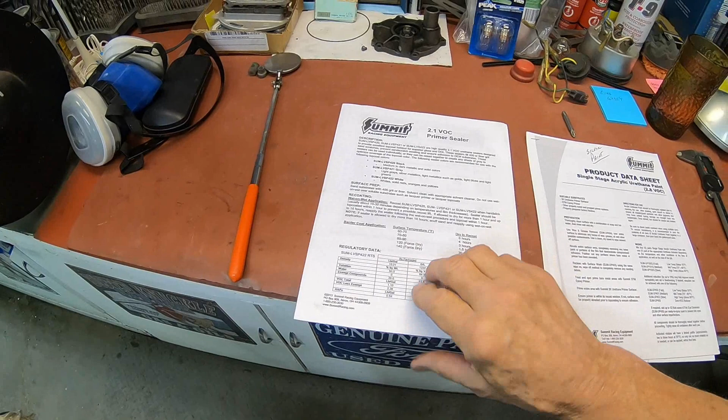Okay, these are what I'm going to use on the 125 MX gas tank. I'm going to use the primer sealer from Summit, and it tells you how to mix it, how long to wait between coats, how long to wait before you tape it. Anything that you need to know is on that sheet. So that's good to have. I mean, it's imperative that you have it.

And then I'm going to use an Omni, which is a PPG product, for my base coat. And it's going to be an MBC, and everything that I'm using for that is urethane. And this is the base coat. And again, it's going to show all the wait times, your gun setup, your dry times, recoat times, and what compatible products there are.

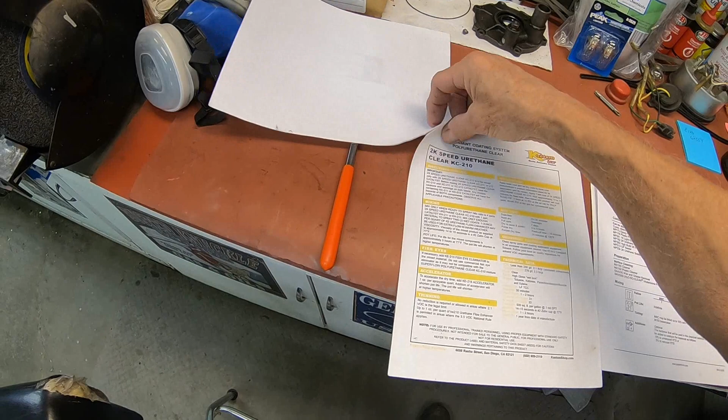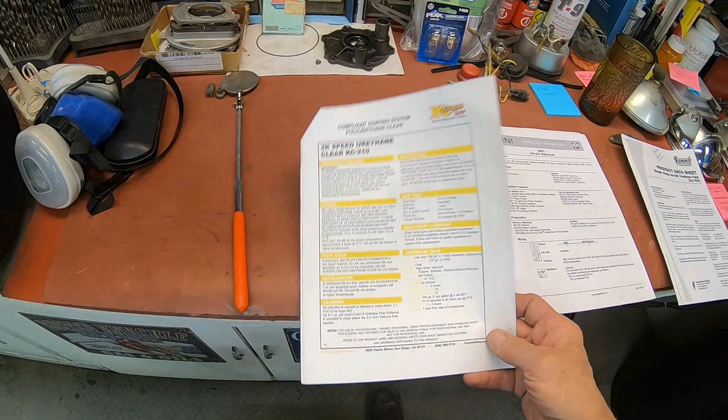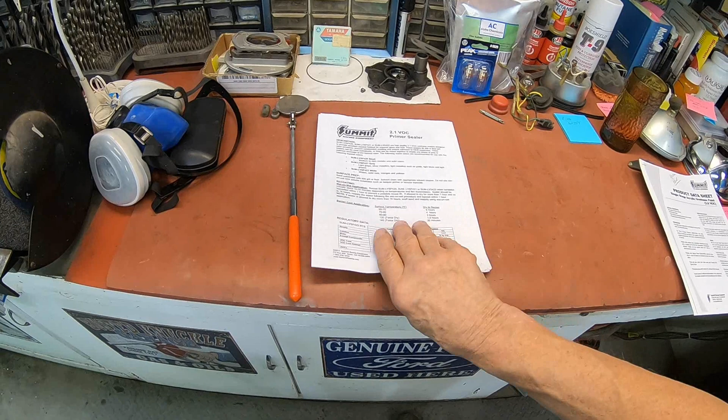And then when it's all said and done, I was painting cars for a while, and this is just leftover stuff. This is the Kustom Shop. I used to get this from, I'm trying to think of the name of it. It's TCP Global out of San Diego. And I bought a bunch of clear, and I've still got a bunch of it, and I use it, and I have not had any problems with it. So that is the lineup for that. And of course, the base coat.

This also includes the silver that goes under the red base coat. For the candy colors, you've got to have a silver in order to make that pop right, or silver for these bikes. That's what Yamaha used under theirs. So I'll have the silver, which will be one, and the other one is the red, and they're both MBC urethanes. So everything I'm going to use for that is right there.

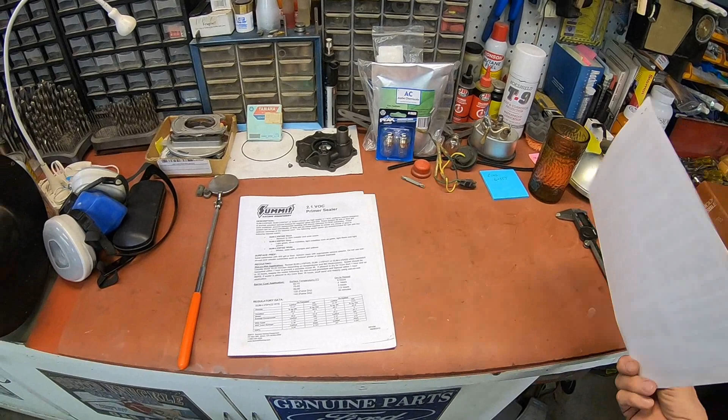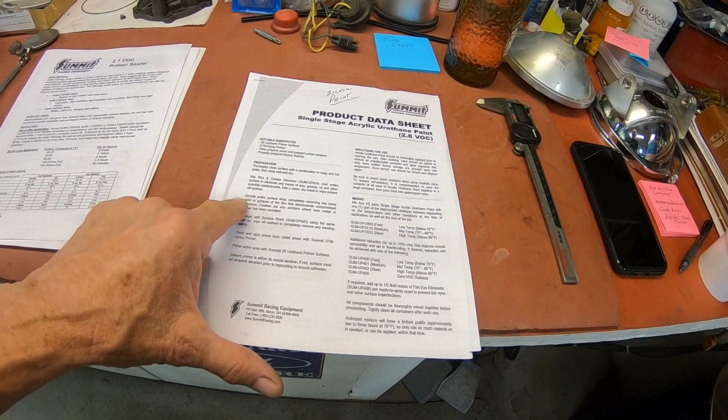Now, right now, I'm going to paint the fender and the side cover for the Suzuki, and I'm going to use Summit Racing's silver paint. And it is a single stage, so there's not going to be any clear. Clear's made in it. And that's what I painted the gas tank and, I think, the rear fender with.

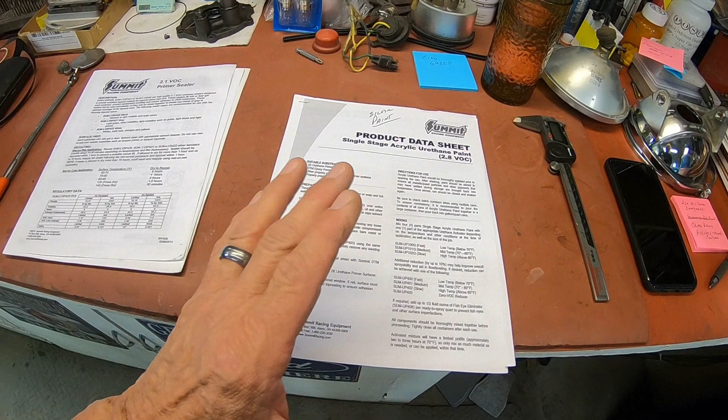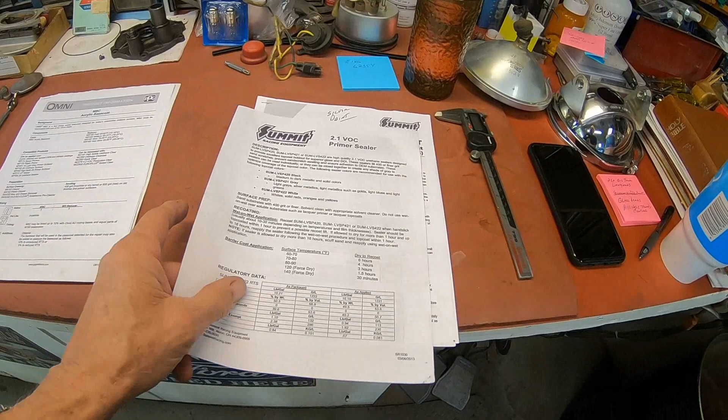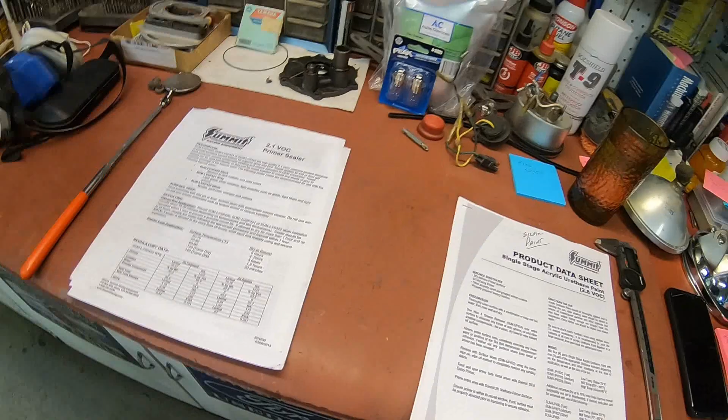So the only parts I've got left are the front fender and the side cover. So I'm going to use the same paint, and it's single stage, like I said. And again, it's going to tell you all the particulars that you need to know about that. And with that, I'm going to use their primer sealer, just like I am with the gas tank. So these two with the fender and the side cover, and these three with the gas tank. Just depending on what you're doing. Like I say, we're eliminating the clear here because the clear is made into the paint.

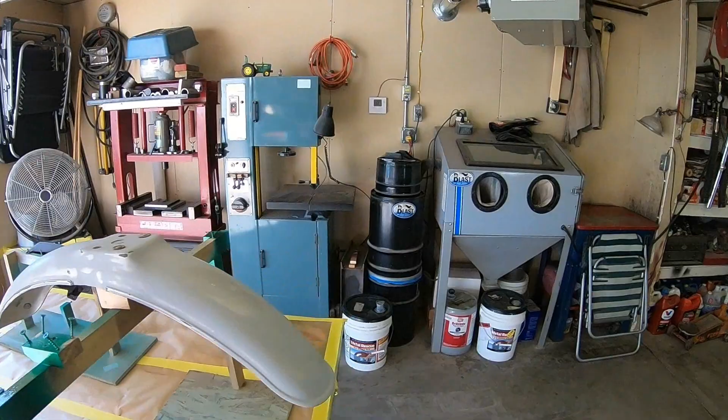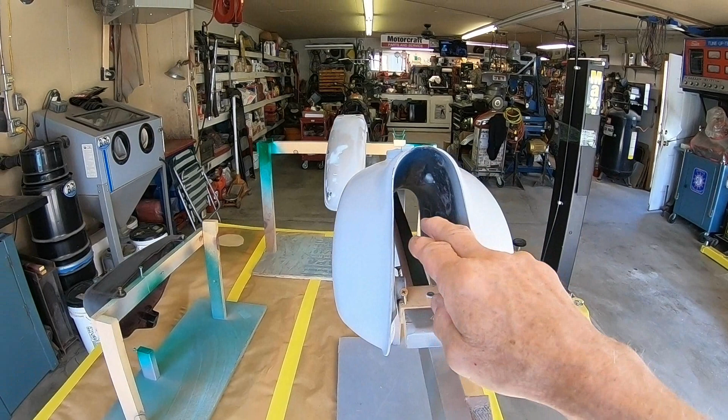Just a word about holding whatever you're painting. I had one person ask me how I was holding the tank, and I think you can see it where I show the paint job on the green tank, but it's just like I've got it here. She asked if it was foam. You could certainly use foam. I didn't even think of that. The only thing with foam is the paint products may melt it.

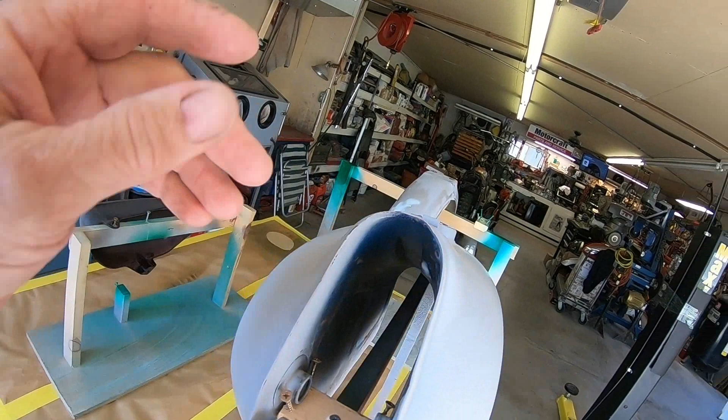When you shoot, you want to shoot a little bit of the paint up in here so that you still see the base color in here. You don't want to see white or something if you got a black tank or whatever. But that's all I'm doing, is I've just got a little thing here so it can set on it. Let me see if I can pull this up just a little bit.

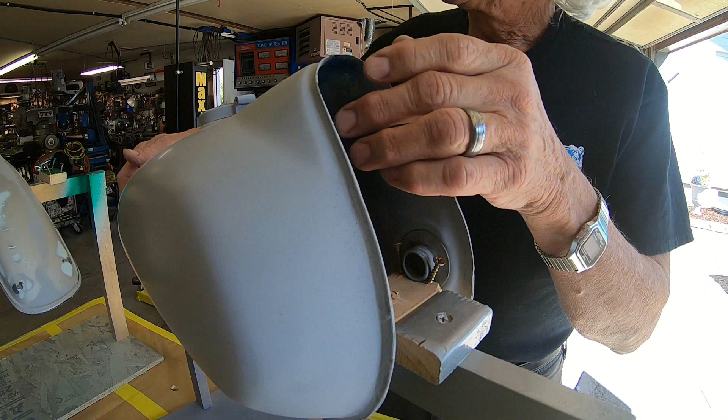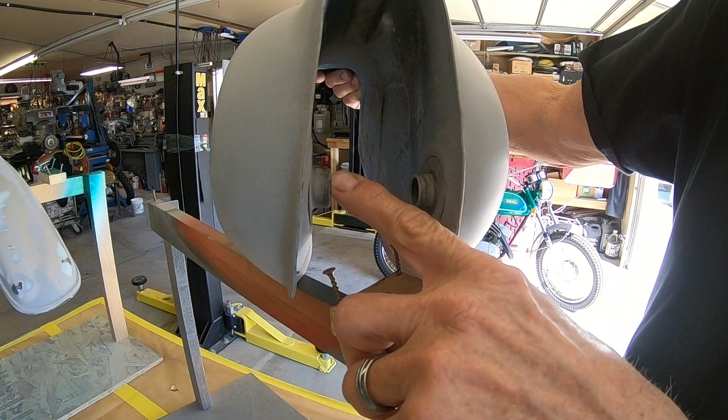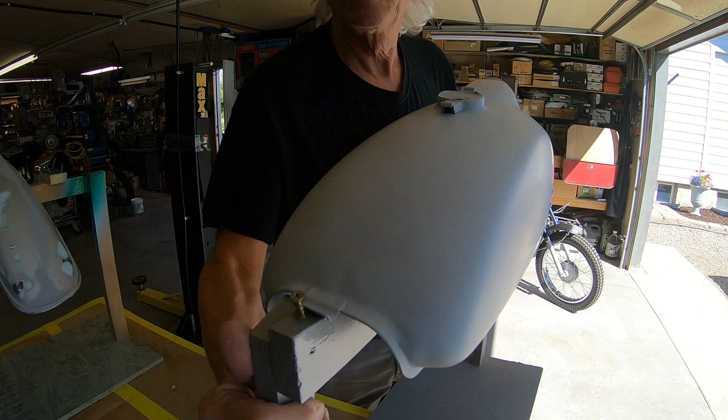Okay, so in my case, I can still just bring it straight up. And that's all I've done, is I've just made these blocks here. This one here's a little shorter. It was for a Suzuki I did. I'm just basing everything off of these points here. And the Yamaha needed a little wider one. And this keeps it from sliding off. And at the same time, on the back, I've got a screw there to keep it from coming off. So I can manipulate this pretty good without having to worry about it coming off.

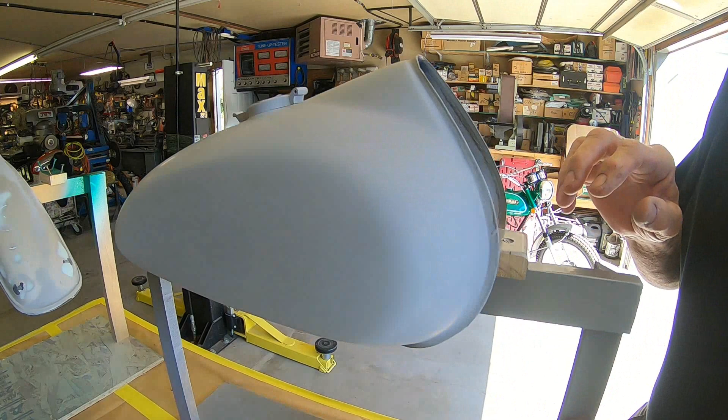But you know, the foam would probably be a good idea if you could get it back far enough where the products you're spraying aren't going to maybe melt it. But this works pretty good for me. It's just whatever you can make work.

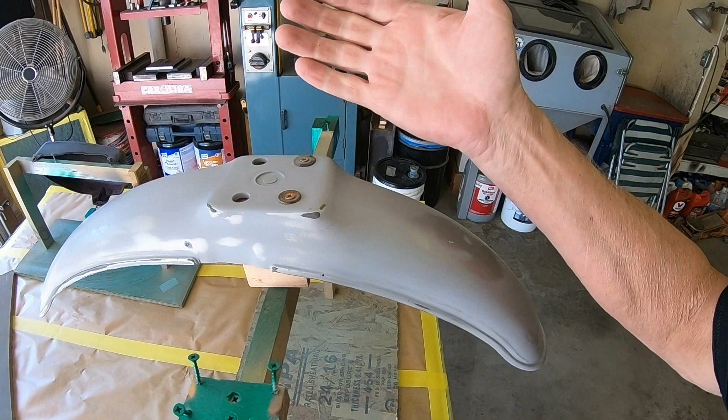Here's the one that I painted the green tank on, and now I've converted it to hold my front fender for the Suzuki I'm going to do. And I'm not worried about whether this has got a little bit of a round area around it when I'm done painting. This little area will not have paint on it. And that's okay, because it's just going to get bolted up underneath the triple tree. You're not going to see it anyway. So for the most part, you just want to make sure it's held good enough that the gun pressure is not going to blow it around or off.

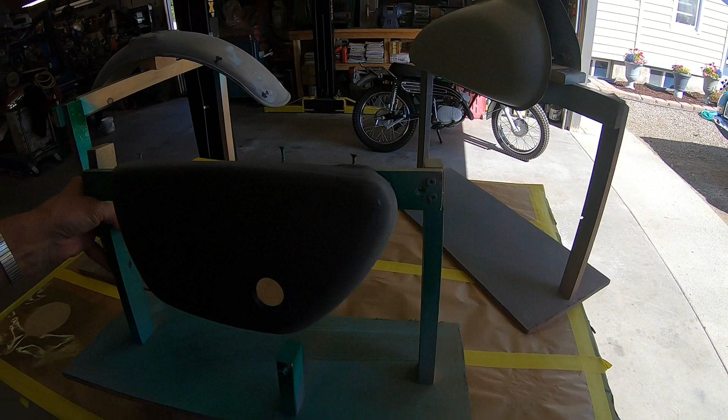If you remember right, this is the item here that I used to hold the oil tank on the green bike, and now it's holding the side cover for the Suzuki. And it's pretty secure. I don't think it's going to go anywhere, but you just got to work with what you got. And I just use some plywood or OSB or something to build a platform that has a big enough footprint where it's not going to blow over from the pressure of the gun.

So I had a couple questions about that, and I just thought I would go over that and show you what I do. But it's what you do. Just be creative, and you just got to hold it. That's all you got to do.

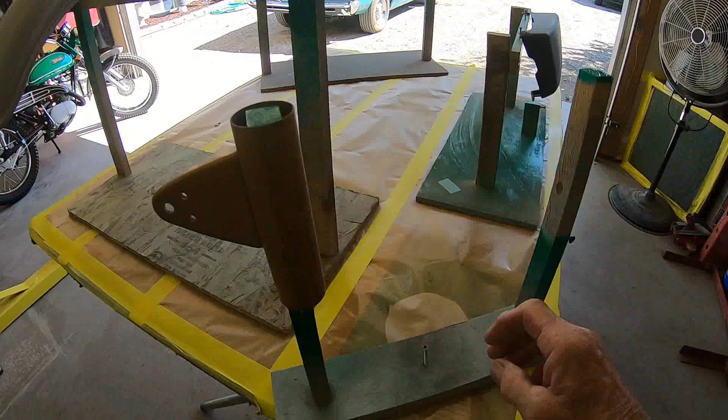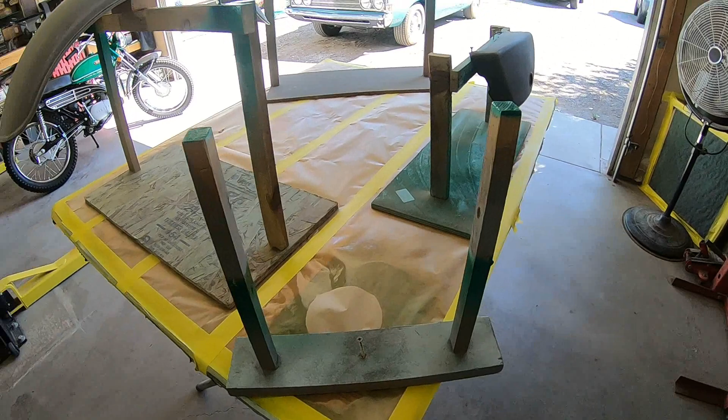Oh, I forgot to cover holding the one for the headlight ears. This one would blow over, so I've got a screw in it right here, and I just screw it into the top of my table. And put it out here on the edge so that I can have good access to it. But there again, you're just trying to hold it, and you just need to think about, while you're painting this, is it going to give me complete access? And you're probably never going to be 100% complete.

I noticed on a couple spots on the green bike that I just did that the film thickness maybe just wasn't quite as good in some places. And it's because I just didn't have good access, even though I really tried to get up and under and all that stuff. But you just need to figure out what's going to work for you, that's going to give you the best access and hold your part.

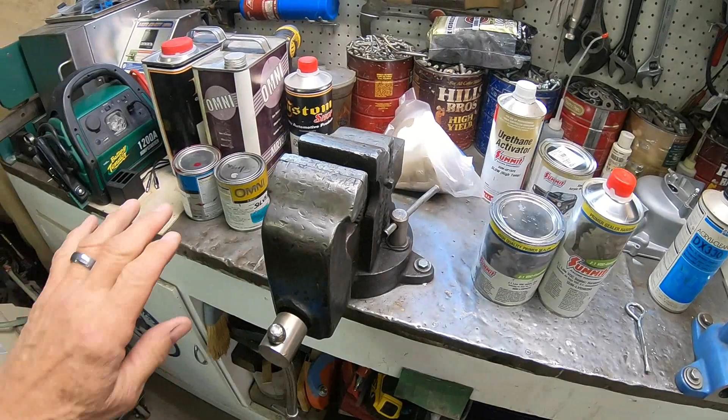Now over here to the bench where I've been kind of mixing everything up, I moved everything out of the way. This is all the gas tank stuff that I'm going to use here. The clear, 2K speed urethane clear, and all the components that I'm going to use for that. And all these, like I say, are Omni products. Oops, I just see that this one is MBP, so I need to look up that one.

I've got it too. Okay, so I've got only the things that I'm going to use for the part of the project that I have at hand right now, which is the fender and the side cover. So I've got the sealer, I've got their two-part, so I've got my sealer and my hardener for that. And then I've got the silver, single stage silver, and the urethane activator for that one. I've got my filters, and I've got the wax and grease remover, and I've already used that on those parts, so we're done with that.

And the other thing that you want to make sure you get are some mixing cups. I believe this one is mixed 4 to 1, I think. I'll have to look, but if you're 4 to 1, you use one of these cups. You go to the 4 to 1 scale, and you're going to pour in 4, however much you think you're going to need of this, and then you go over to the one side, and if you did a 4 over here, you do a 4 here, and that gives you your 4 to 1. So we'll be doing this here in just a minute.

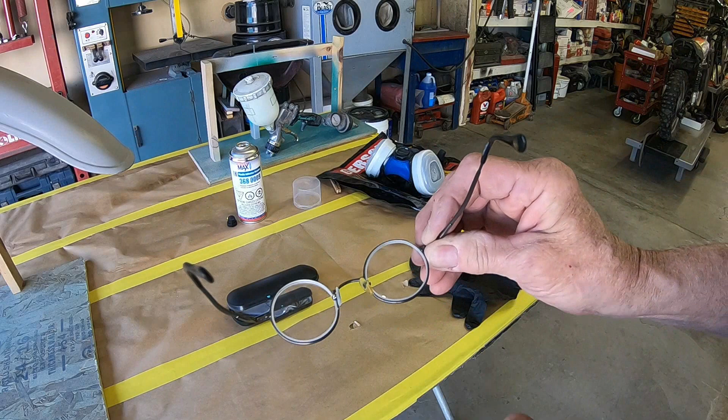And after you're done, really, if you're doing like a car, but I usually keep them around a little while with the bike stuff, because you're not painting that much. And another thing for you that wear glasses, the one thing that's going to happen, especially if you have plastic lenses, I don't know why, but the overspray will collect on the inside more so than the outside.

And in order to, well, you're not going to prevent it unless you wear goggles or something, and that just doesn't work for me. So what I do is I get a pair of glasses made that are glass. So when the overspray gets on there, when I'm done, I take acetone and I clean them up. And that way I don't have to worry about anything getting melted on my regular glasses.

Now, my regular ones are plastic, and I have in the past used acetone to remove paint from them. I can't guarantee that every plastic is the same, but I've always been successful, and acetone doesn't melt them. But that's just me. If you do a lot of it, I would recommend when you get your glasses, have a set made that are of glass, and just use them for that. And that's what I do.

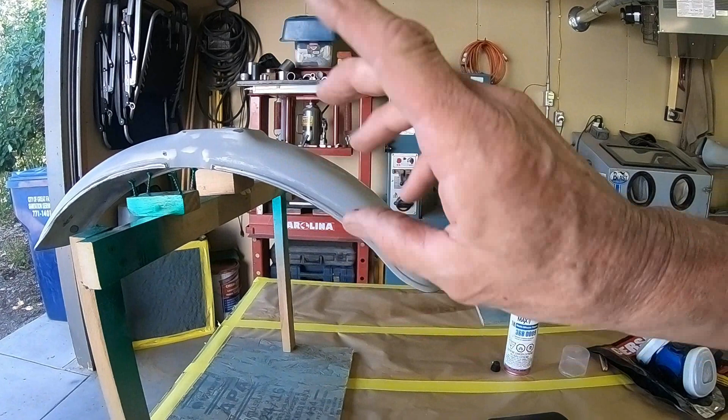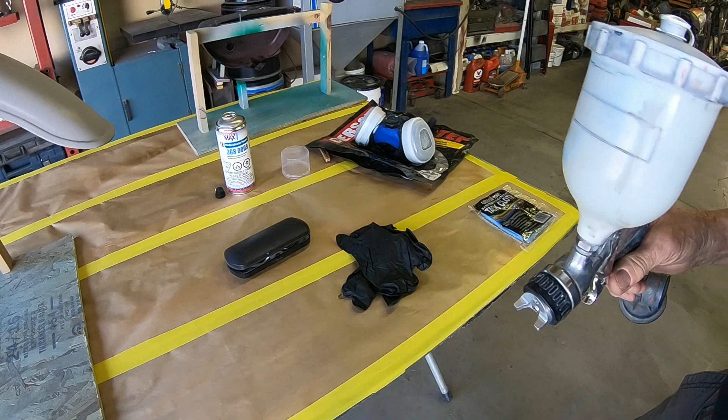And of course, you want to use your gloves so that when you touch these parts, you're not leaving your greasy fingerprints all over them. And of course, your gun. I've had people ask me what gun I use, and this is one of mine. I used to use this one for primers, but it's really kind of my go-to for anything.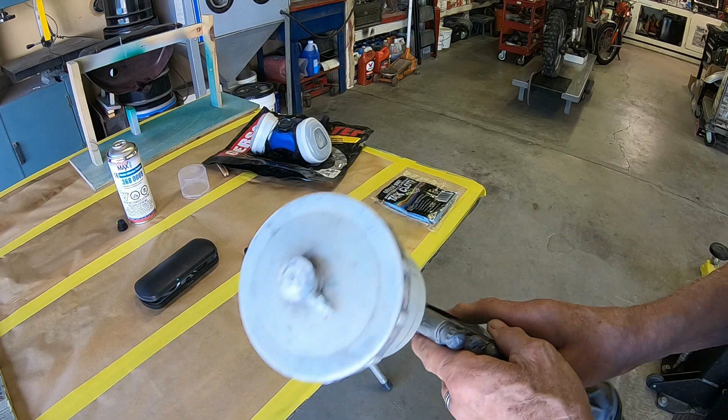And with these motorcycle tanks and stuff, I just use one gun. I spray the primer sealer, then I clean it, and then I come back and I put everything on there and clean in between each different component. This is a DeVilbiss FinishLine. Not even sure if they're made anymore, but I've always liked this gun, and it's worked good for me.

I've got several DeVilbiss guns, but I really don't want to mess with them. I used to paint a lot of cars, and that's what I used. I had one for primer, one for my base coat, one for my clear, and a small one for doing door jambs and stuff. But anyhow, I've heard a lot of people say that the Harbor Freight gun is a very good gun. I don't know, but a lot of people say it's just as good as some of the high dollar guns. So you might try it.

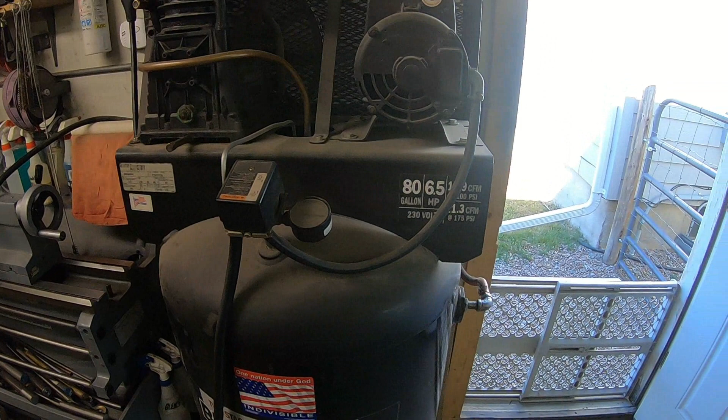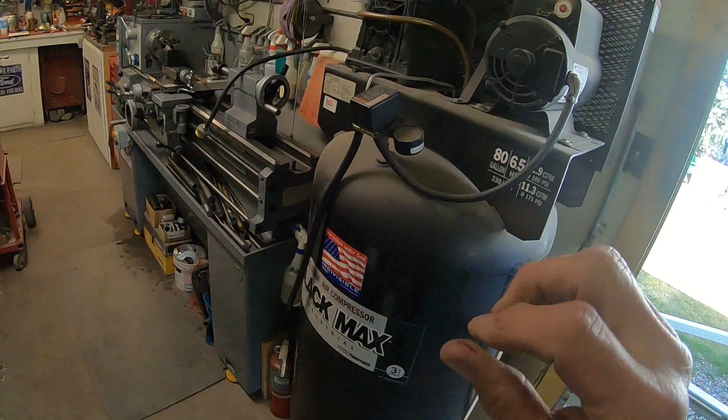And then of course your air supply. I use a lot of air for a lot of different things, from plasma cutters and welders and air tools, grinders, all that kind of stuff, and the paint. So I need a pretty big machine. But you just need one big enough to get the job done, and I'll leave that up to you to determine how big. And enough hose. I've got mine reeled from the top so I can get it out of my hair. But the other thing you need to think about is ventilating your area.

Now I'm going to shut the door down, and right here, I've had a couple people ask me about this. This is my fan, and it goes out here. So when I turn it on, it opens up and it pulls all the fumes out. What I've got here is furnace filters so that it collects most of the paint on the filters so it can't go out here and get on my cars or whatever. So that's what that is. And I've just got it switched here on the wall.

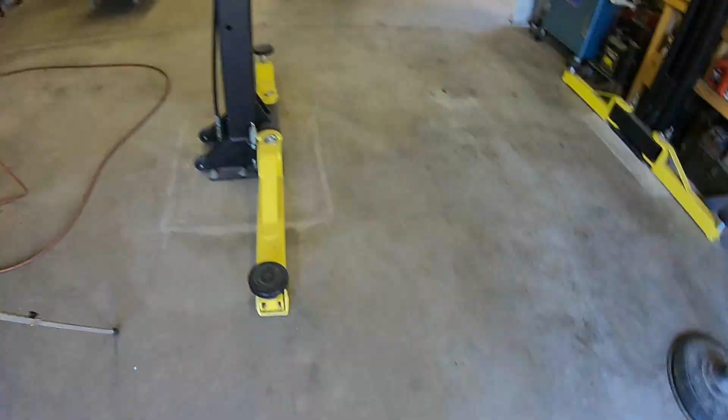So that's my ventilation. Like I said, I'll close the door down, and then I've got a window here in the back. I'll shut all the other doors, and all my air will come in here. Now, when I was doing cars, I used another hole that I've got made just for that, and I put a furnace filter in it also so I didn't bring a lot of stuff in. But this just seems to work okay for me. I don't have a lot of problems.

So I just have to remember to shut this door so I can get the full draw, and then of course the big door too. And I've got a brand new filter here that I haven't even used yet, so if I feel like I'm not filtering out, then I've got a new one.

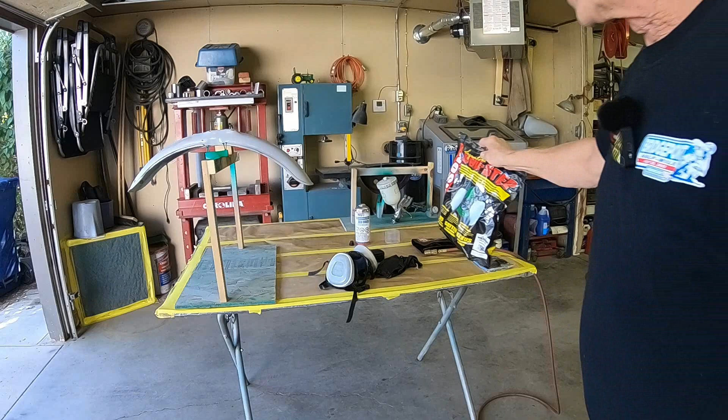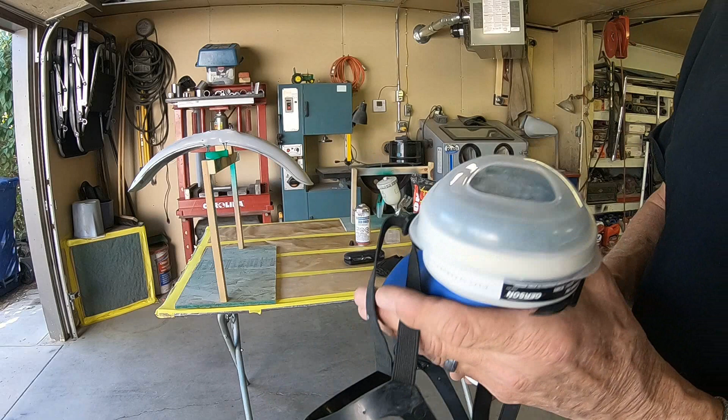You just want to make sure that you adjust your straps tight around your neck and your face so that you get a good seal. If you're smelling any of what you're spraying, you don't have a good seal, or you don't have a mask that's capable of doing the job.

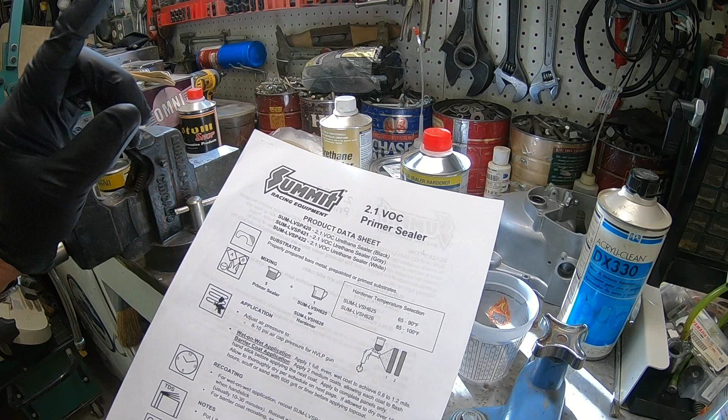Okay, on the primer sealer, we are mixing 5 parts sealer to 1 part hardener. So that's what we'll be doing on our mixing cup. And I don't have a lot of stuff down there to paint, so I don't need to mix up very much. But we'll use 5 parts.

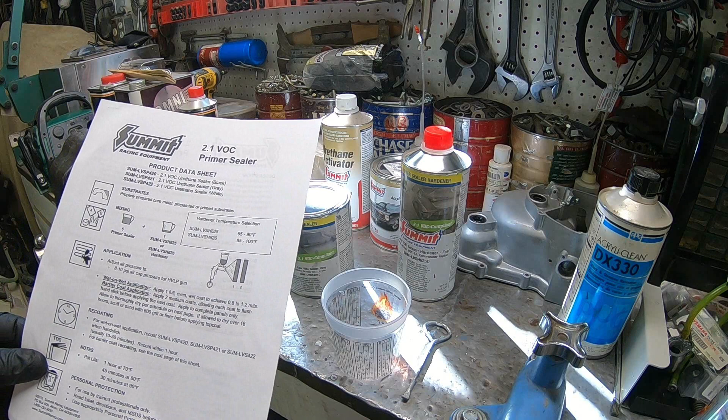So I'm probably going to go to the 1 and then go to the 1 right here. And that should, I think, give us enough for the 2 plastic pieces that we're going to do. You just don't need to do any more than you need. And this is only 1 coat. That's all we want. You don't want a bunch of wet coats on there. So let me get that mixed and I'll bring you back.

Okay, now remember to use a separate stick for all your different components. You don't want to mix them. And if you've got any hardeners, never put one that you've used with hardener back into a product that does not have a hardener that you're not going to use, because it will harden it up. It may take a little while, but it will harden it up, and you don't want that. You're just wasting your product.

So I had a fresh stick here. This is just the plain sealer, mixing it up good. And then get me a little paper towel here so I can be sloppy, but not too much. You're going to pour that in. Okay. That's 5, which is on the 1 scale. 5 scale up here, the 5 to 1, and then I'm at 1 on the scale at the bottom.

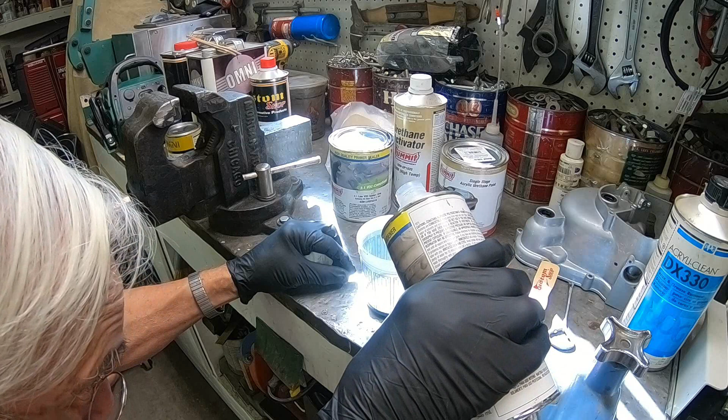Now I'm going to take the hardener and I'm going to go to 1 on the next scale. Okay. Now I'm going to stir this, and when I'm done, I'm going to throw this stick away because it'll have hardener on it.

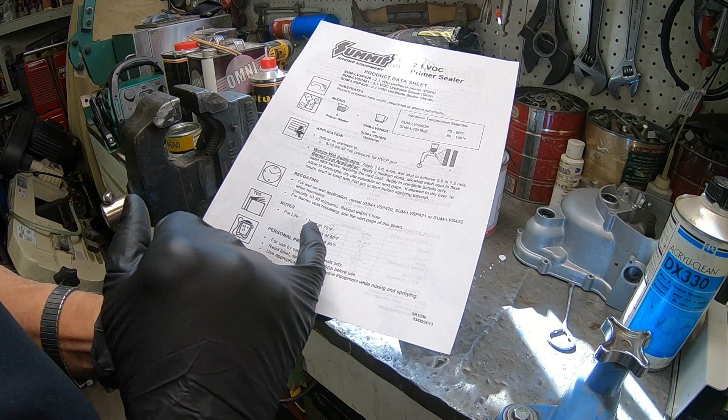Okay, so this mixing cup is catalyzed. That's what they call it when it's had the hardener put into it. So at this point, at 70 degrees, it's telling me I've got 1 hour, my pot life. So I have to use this within an hour. And we're going to do that. I'm going to move all this stuff here that I just mixed up, because hopefully we're not going to need that again for this project. And we'll go ahead and get this in the gun.

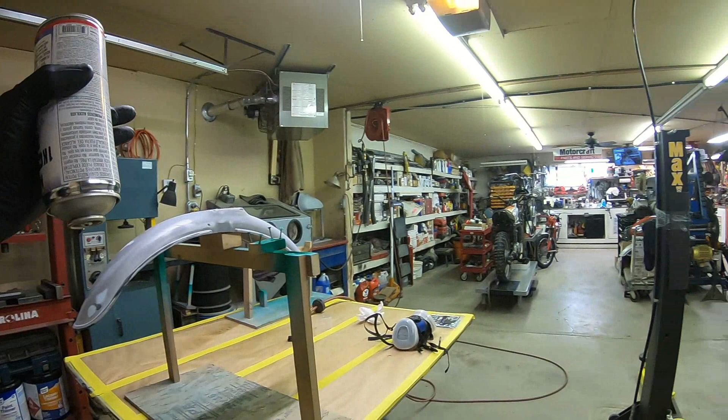The only thing I need to do is go down there and spray the plastic promoter first, and then we'll go ahead and get the gun set up. Now, one thing you might say, it's not so on this one, but you've already put primer on here, and a lot of times, like with the gas tank over here, that's true. That's a regular lacquer type primer. Most of it ends up on the ground because you sand it with wet and dry sandpaper, so it ends up on the floor.

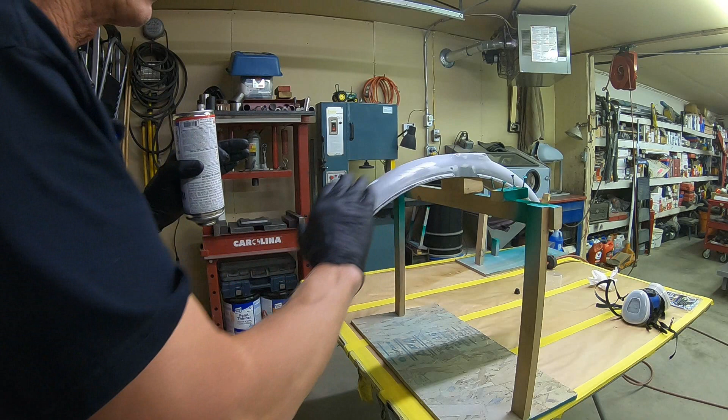So it's kind of a cheap stuff, but you want to be very careful when you start putting this kind of primer, which is also a sealer, on it, because if you put it on too wet or too many coats, it will lift it. Now, this one doesn't have any primer on it like that. There's a few little places where it's left over, but the main reason for the sealer is to prevent bleed through of your body repairs.

Otherwise, I've got a little Bondo here. And with a lot of paints, if you don't put a sealer on, you'll end up with that bleeding back through to your paint. So it just looks terrible, and it messes up your whole job. So don't skimp on your sealer. And I have done it before, and even with the sealer, I've had bleed back or bleed through. So you just have to be careful.

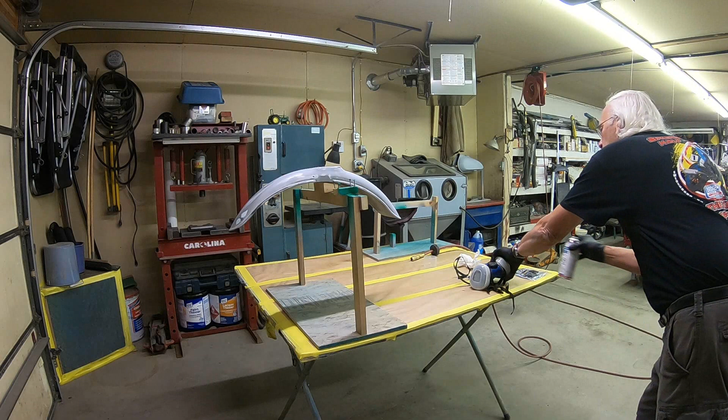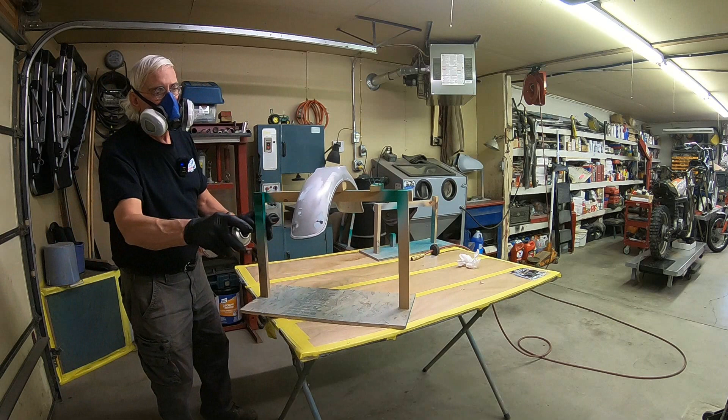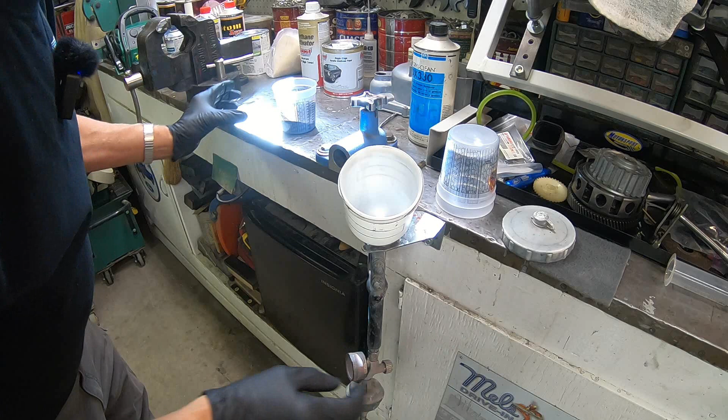I'm shaking up the plastic adhesion promoter real good here, and I'm going to give that a shot here in a minute. Just one coat. So we're just going to go ahead and load our gun. And you want to make sure to use a filter.

Okay, we've got the one coat on, that's all we need. And it tells us to wait until it's hand slick or 10 to 30 minutes. That's about what that is. And hand slick, you just find a place that's kind of inconspicuous and just rub it lightly. And if it feels sticky, it's not ready yet. But if you can, hand slick. So if it slides pretty easy without sticking, then you're ready to go ahead and start putting your top coat on.

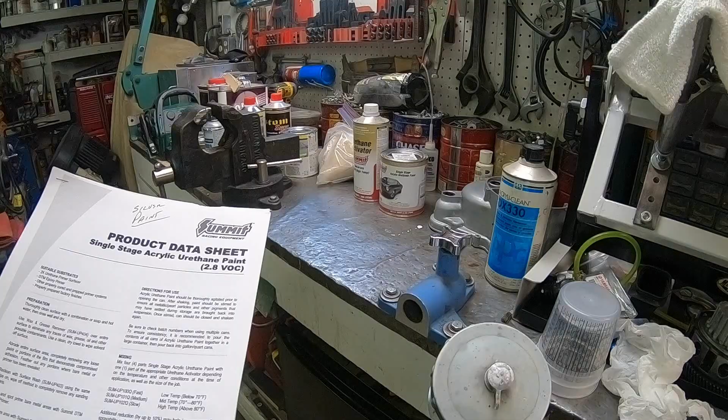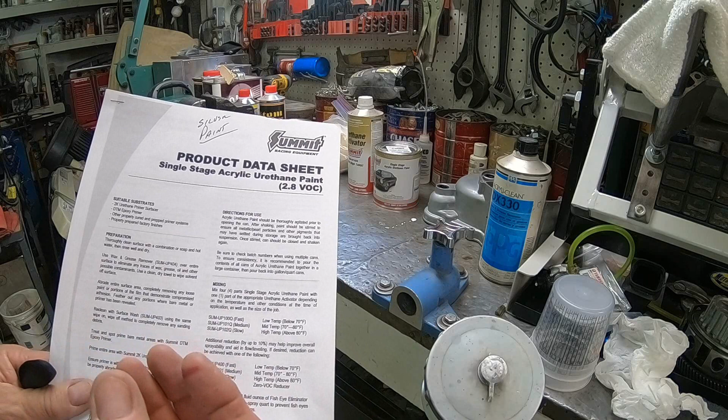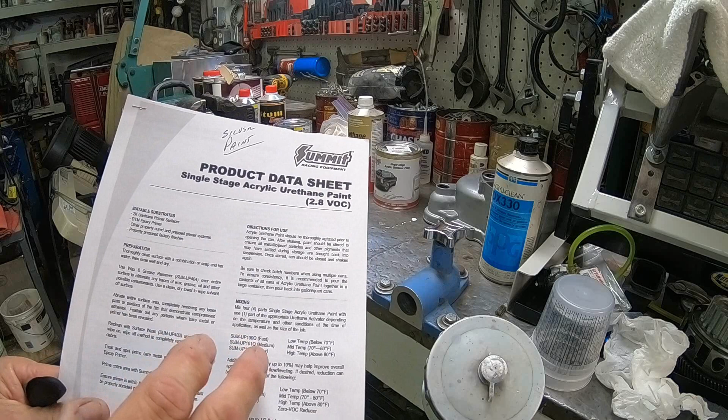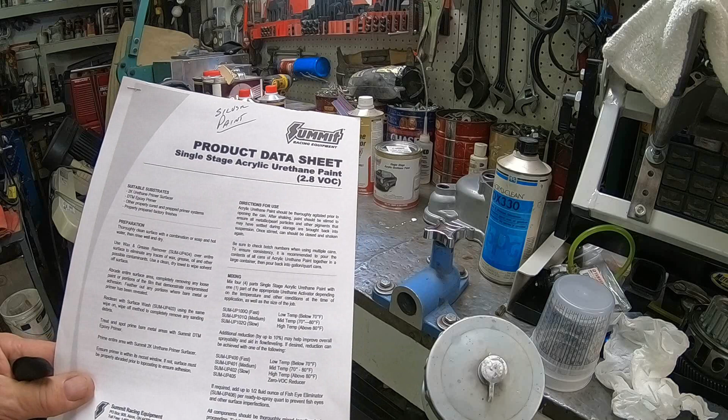Okay, while we're waiting on that to dry, we're going to start mixing up our silver paint. And this one is mixed 4 parts of the paint to 1 part of the hardener. And it tells you that if you need a little help with the flow out, then you can add up to 10% of your fast, medium, or slow reducer, depending on the temperature. And we're between 70 and 80 degrees here today. I don't think I'm going to need any. If after the first coat it looks like I do, then I'll come back and add some. But we'll go ahead and mix that up.

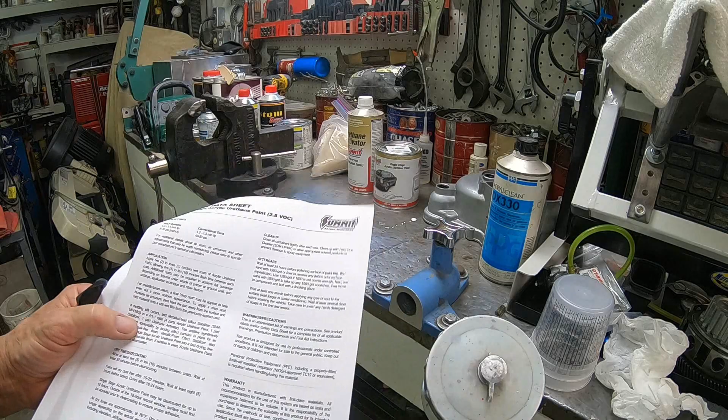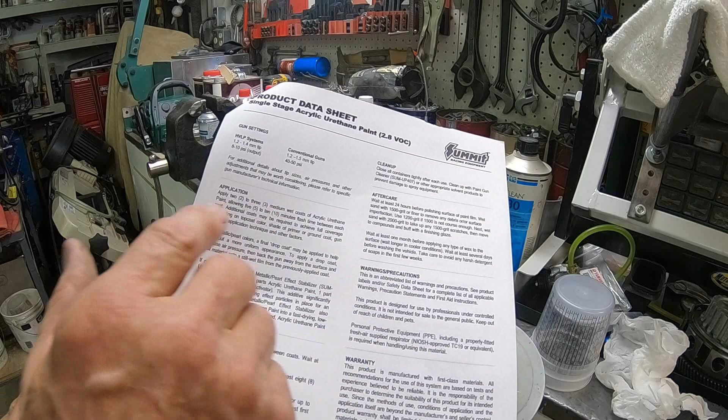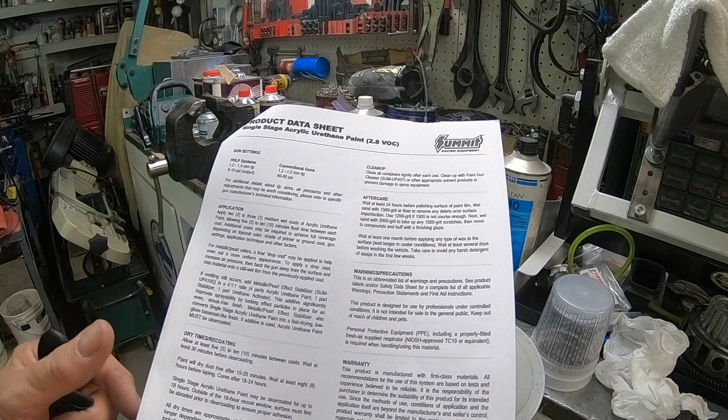And it tells us when we get ready to apply it, we can apply 2 to 3 medium wet coats and allow 5 to 10 minutes flash between each coat. So you want to pay particular attention to that so you don't get back into it too quick and end up with a run. So let me get this set up and we'll start mixing it. Okay, we've got that mixed up and we'll go ahead and load it into the gun.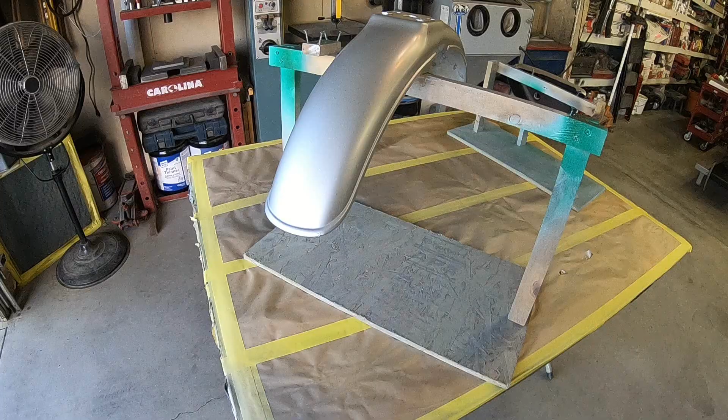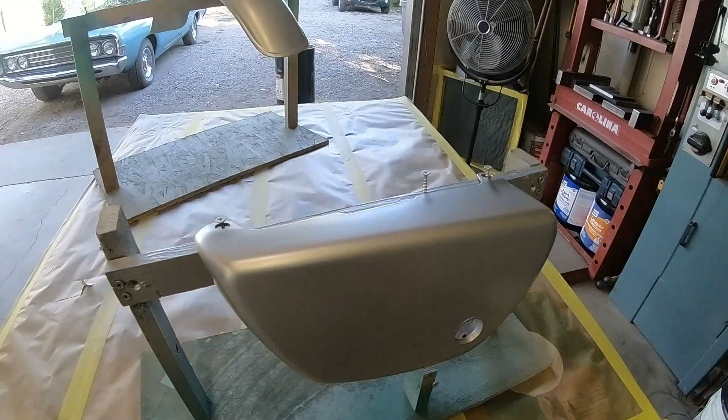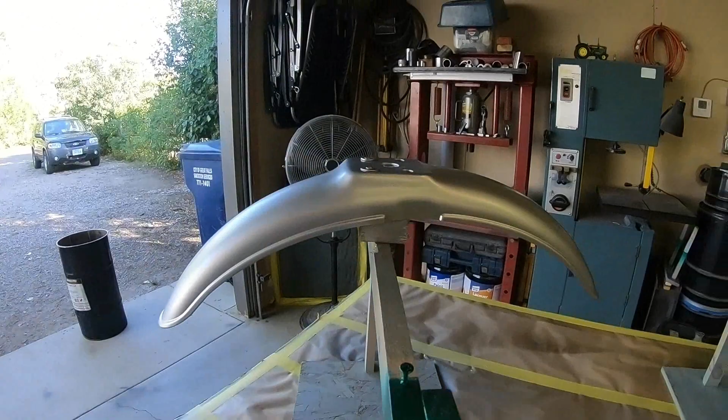Okay, we're just going to let that cure out till whenever I get ready to put it on, I guess. And side cover, same way. There's trash in it. I mean, that's just the way it is with a garage paint job. Just not perfect, but you just have to either accept it or pay the price and have it done professionally. And I just can't afford it for my own stuff, and most of the people that I work for, they can't afford that much put onto their bill either.

You get what you pay for, and you're getting a rookie here. But I just wanted to give you what I do. And it's certainly not right all the time, and it can be improved on. But this is how I do it, and if you want something perfect, you're gonna have to pay somebody. I'd say for a tank and both fenders and headlight ears and oil tank, you're probably looking at over $1,000 these days if you can get them to bother to do it. People don't want to do little jobs like that because there's not a lot in it.

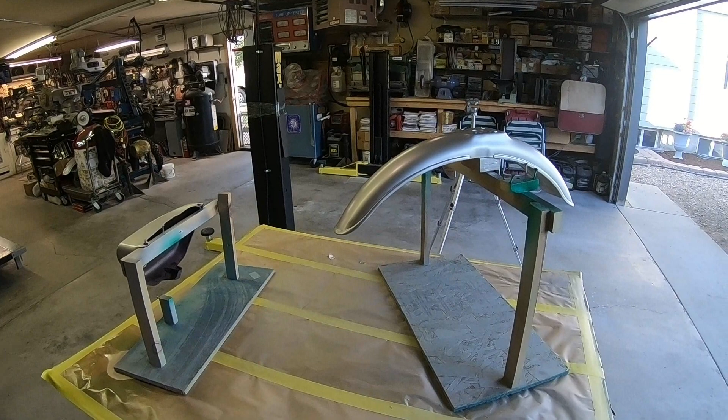I found out early on when I started working on cars and later on bikes, that if I wanted paint done, I was going to have to learn how to do it myself, because even though it may not be the greatest job and I may have a lot of issues, runs or wrinkles or lamination or whatever it may be, you learn about it and figure out how to prevent it.

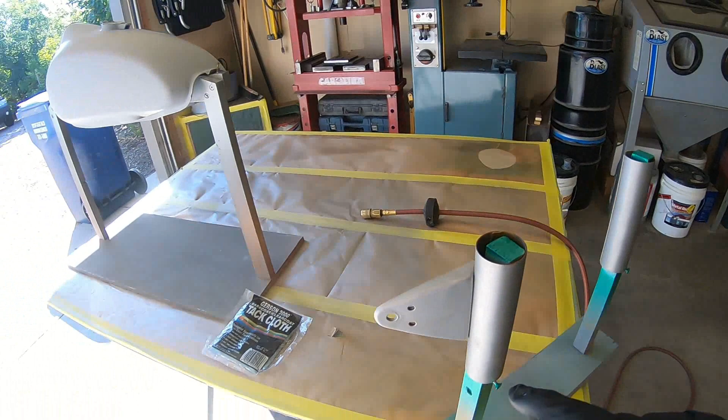Okay, getting ready to start on the MX tank, and I've got another set of headlight ears here that I really hadn't planned on, but what I guess I had was a set of 125 headlight ears that I did for the green bike. I'm almost certain they were, and they are a little different because of the size of the headlight bucket. And I want to take you out and show you the difficulty that I'm having.

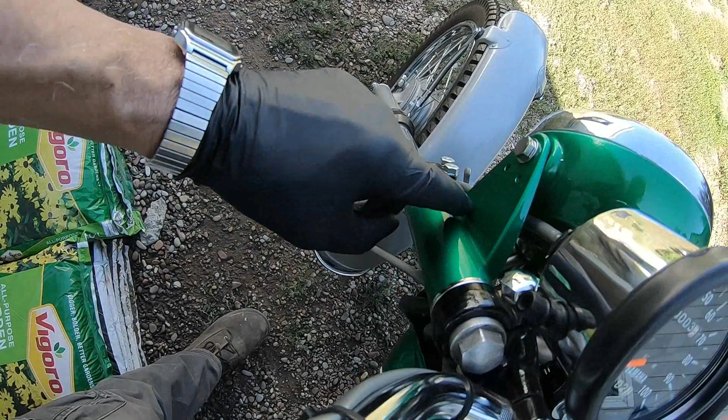Okay, you see where they're kind of sticking out. That's because this, I believe, is a 6-inch bucket, and the 12-volt one used on the 125 AT1 is a 5 or a 5.5. So the location of these are different. So I've got to do some for a 175 for this size bucket. Give you another shot of that bike out here in the more natural light.

Anyhow, there's nothing different about what I'm doing here right now for the prep on this. I'm still mixing the same primer sealer at 5-to-1, and then we'll come back, shoot the silver on both of them, and then I'll probably take the tank away and go ahead and shoot the green on the ears, and then take them away, and we'll shoot the red on the tank.

I wiped this down with soap and water, then abraded it with the gray 3M pad, and then cleaned it with wax and grease remover, and again with soap and water. And now I tack cloth it. So we should be good.

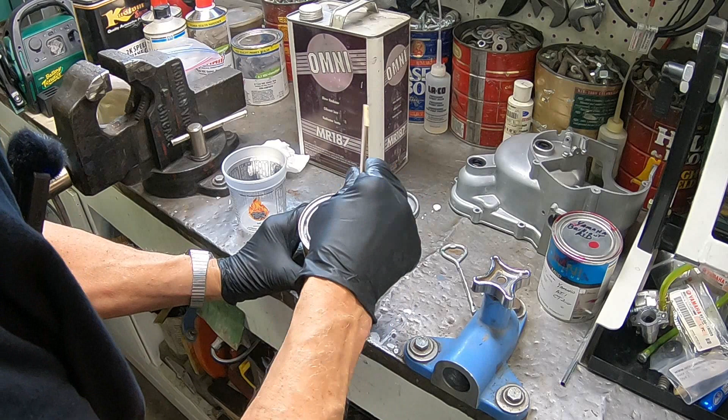Okay, we're mixing up the silver. And this is mixed at 1:1, 1 part paint to 1 part reducer. There's no catalyst in this. This is just base coat.

You know, I think I've got more there than I need. I'm going to put a little bit back. Okay. Just a little more than I need. We'll only get 1 coat of this. Okay, let me get that mixed up and get it in the gun.

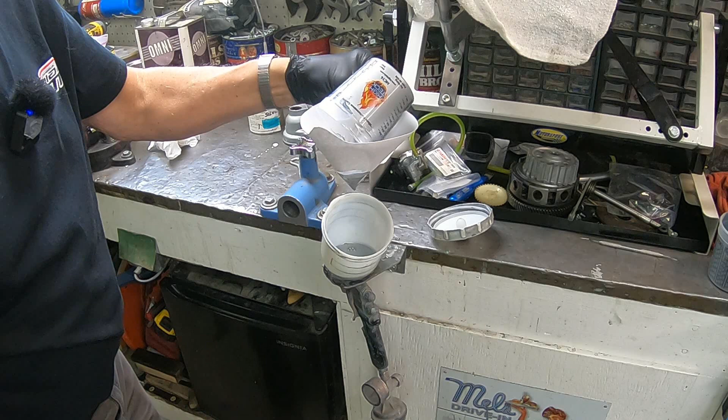I just throw the mixing cups and everything away. I just don't want to fool with them. But I save it until after it's shot and I think I'm done, then I throw it away. But if I need to mix more, I can still do it. Okay, we're on to the silver.

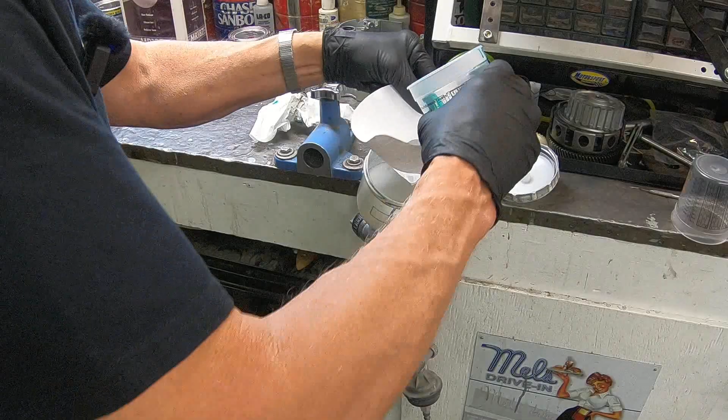Okay, one coat of silver. And this again is the green for the headlight ears, mixed at 1:1, 1 part paint, 1 part reducer. Not going to take very much.

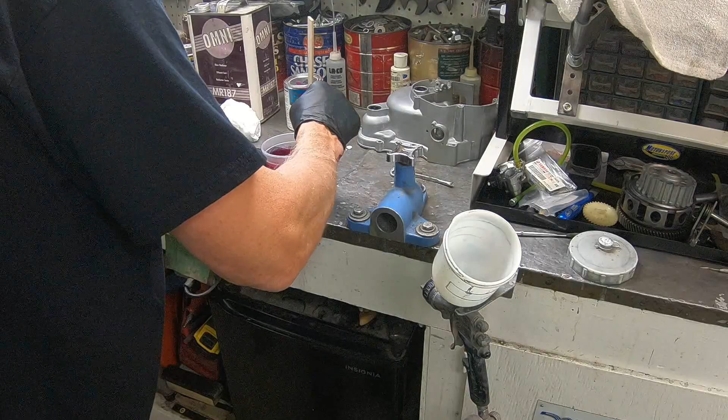So again, we're at 1:1, 1 part color, 1 part reducer for the red.

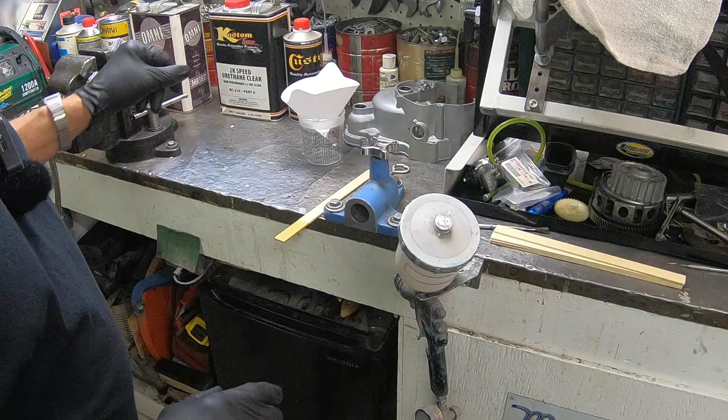Okay, I just loaded up the 2K speed clear, and it mixes at 4 to 1, so 4 parts clear, 1 part hardener. So I've got that ready to go, and we've got just a few minutes to wait before I can go ahead and shoot that for the start of my window. Let me get you down there.

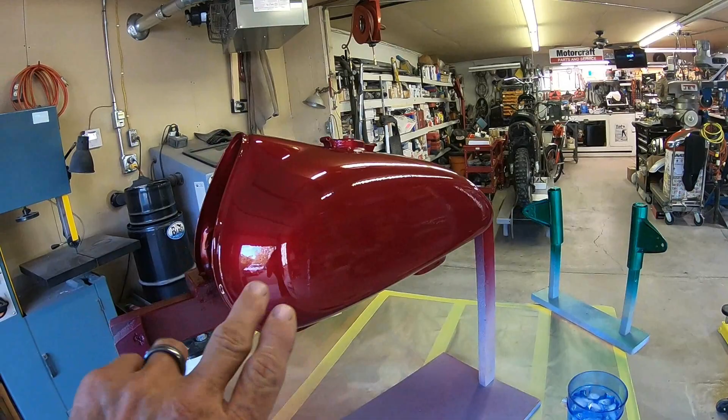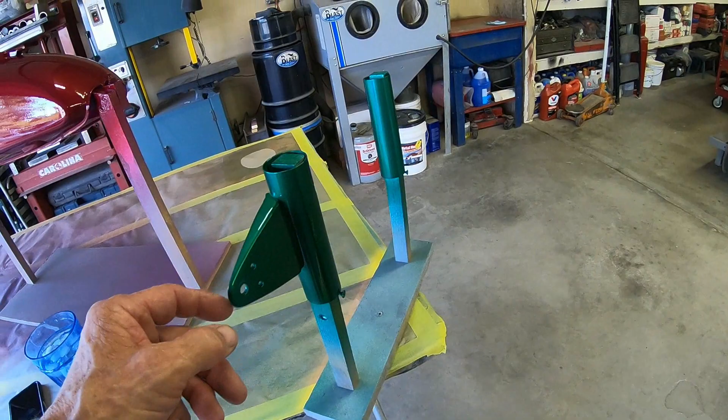Okay, there's our MX tank ready for the Yamaha decal in 3 or 4 weeks. We'll give a good time to solvent, and then we'll get those installed. And the headlight ears, these are actually off of 175. I can't believe I made that mistake, but I did. So Robert, there's the red tank you were talking about.